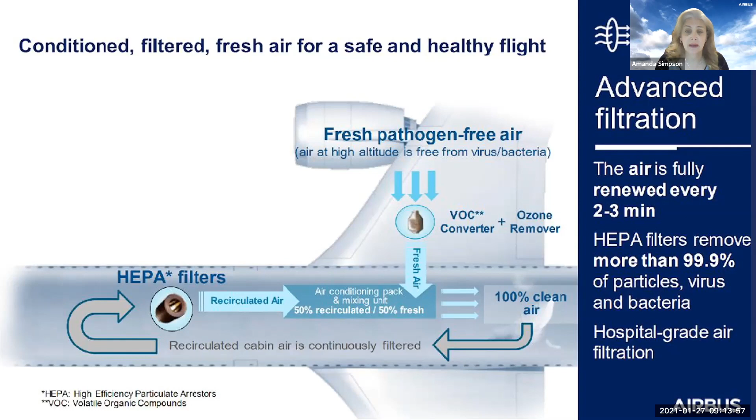Next slide. So this kind of shows what's going on with the air in the cabin. The air that comes into the cabin enters along the roof line. It is being blown in above the luggage bins, along the wall, and coming down through those little adjustable gaspers, as we call them, above your head.

So all the air flows from the top down to the bottom. It is then evacuated from the cabin along the joint at the floor where it meets the walls. Air does not flow from front to back or back to front. It only flows from top to bottom, so there is very little airflow between rows or between seats. That airflow is about 1 meter per second, so it's a little bit of a breeze, not so much that you feel it unless you turn on the gasper and it's blowing on you, but it is always providing very fresh, clean air for each and every person on board the aircraft.

So some of the things we've done, I look at it as a 3-legged stool for evaluating how clean and fresh the air is and how safe it is to travel even today. Airbus, Boeing, Embraer, we've all done what we call computational fluid dynamics, evaluating the flow of air through the cabin through advanced computers. These have been validated by an independent study by Harvard University that showed it is very safe. Even if a person is sick next to you, you have a very low probability of catching what they have.

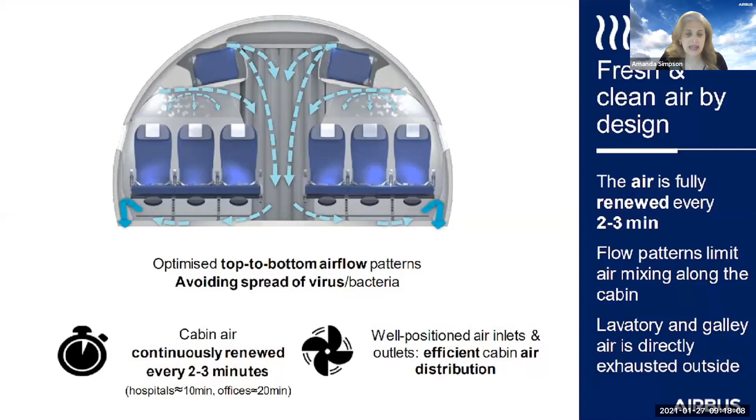So those are the things we're looking at. We're also evaluating new materials for the future, new systems for, say, touchless lavatories to make everything cleaner, to make everyone safer on board an aircraft. But right now, it is indeed safe to travel in an airliner. So moving on, next chart.

We're going to talk about one of the longer term issues, which is the environmental impact of aviation. And what you see here on this chart is the CO2 emissions from aviation. You can see the dip in 2020, and then we expect it to once again continue to grow as air travel grows, which is historically at about a little over 3% per year. The problem is we've got to stop the amount of emissions. The agreement and the industry goal is to get that down to half of the 2005 emissions by 2050.

And we're looking at a variety of different ways, and you can see those by the colors. One is, and this is already happening, airlines are offsetting their carbon emissions by various economic means. One of the things that is being touted very much in the future is sustainable aviation fuel, which would utilize carbon dioxide already in the atmosphere and recycle that into aviation fuel, thus reducing the amount of new emissions going into the atmosphere.

That thin orange stripe, that's operations and infrastructure. That's about how we fly. It's reducing the amount of time that aircraft are actually on their route or at altitudes where they are emitting more carbon dioxide than they do today. So it's becoming more efficient. It's reducing, delaying start time of aircraft so that they don't have to hold when they get to their destinations. There's lots of infrastructure and operational considerations that are going in.

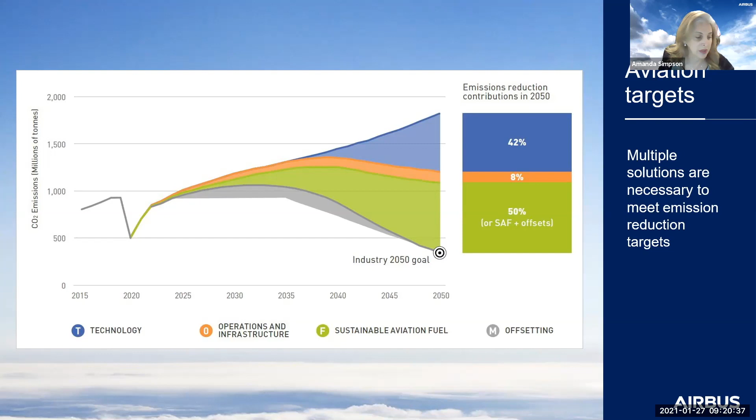And then the blue is what do we have to do with regards to coming up with new technologies to close that gap in the future. You can see that blue starts in about 2035, because technologies that are being looked at today won't actually be put into operation at the earliest till the mid-30s. So I'm going to talk about what some of those options are. Let's go to the next chart.

Some of the technologies we're looking at, we call it DISCO, the disruptive cockpit, which is adding automation and capabilities to the aircraft, because we believe there will be a need for single pilot operations. What does that mean? It means more automation, more autonomy, bringing some of those capabilities I talked about in operations actually into the cockpit so that the aircraft operates more efficiently and thus reduces the amount of carbon dioxide emissions.

Wayfinder is a project that is looking at autonomy. This was a spinoff of one of our projects I'll talk about later, Vahana, and they built a certifiable and scalable autonomy system for self-piloted aircraft. They are actually using that as part of the next project, the autonomous taxi takeoff and landing tests that were done last year, which uses computer vision to navigate and detect obstacles.

And we actually have done automated taxi, completely autonomous, hands-off landings and even takeoffs of our largest A350 twin aisle airliner. If you ever get to see the videos, you can watch the pilots sitting there with their hands off the controls as the aircraft performs these maneuvers, takeoffs, landings, and even taxi.

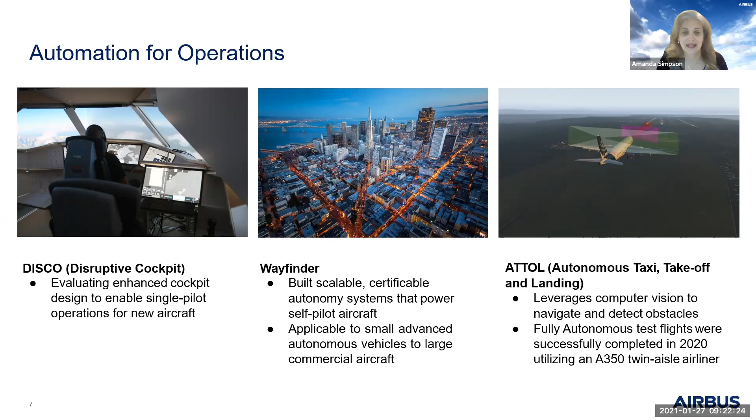We think there's really going to be some groundbreaking technology needed. So late last year, we announced our ZEROe concept aircraft, which are completely zero emission. They are going to be powered by hydrogen. Hydrogen, of course, when you burn it, all it emits is water vapor. So we rolled out 3 concepts, and you can see those there.

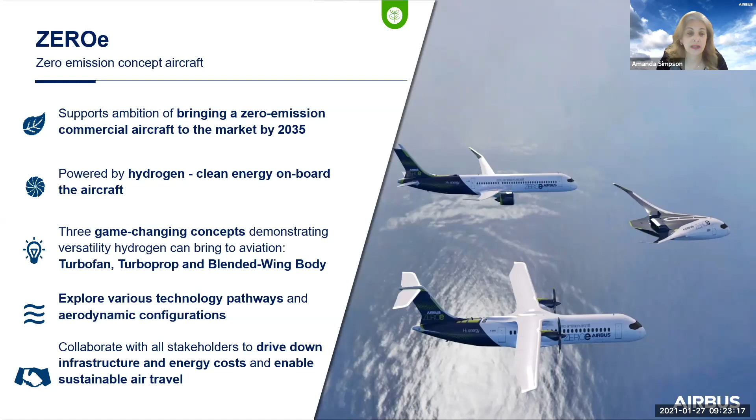I'm going to bring them up in the next chart in a moment. But the idea here is that if you change the source of the fuel, rather than burning hydrocarbons, you're burning clean fuel. So next chart, these are the 3 aircraft: turboprop, turbofan, and something a little bit more modern or advanced, which is the blended wing body. These are 100 to 200 passengers, 1,000 to 2,000 nautical mile range.

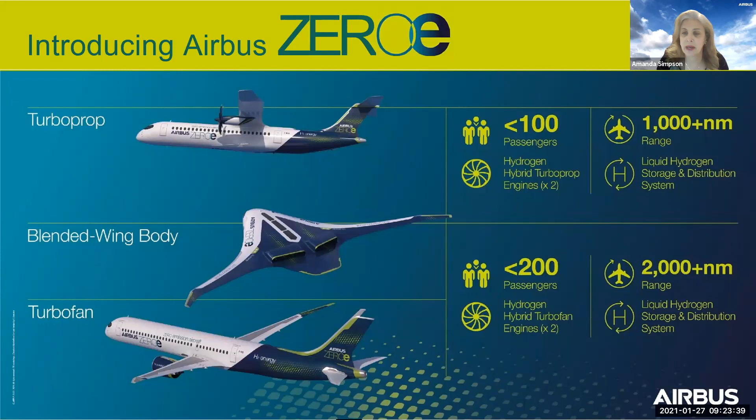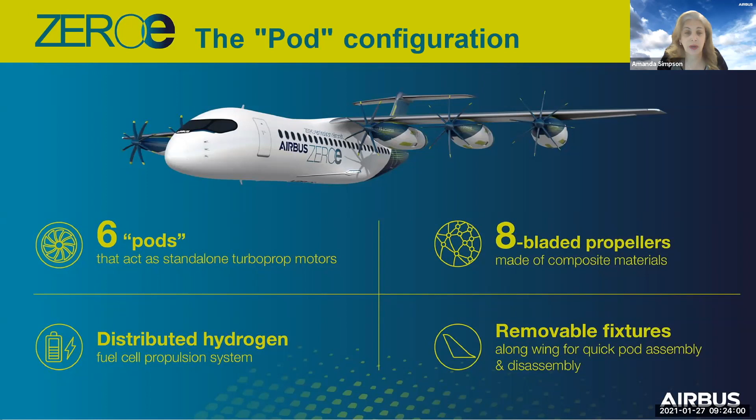Another concept we brought up recently is what we call the pod, which are fully self-contained systems. They have fuel tanks, they have the engines, the advanced propellers that would reduce and make maintenance simpler, as well as an introduction to bringing hydrogen to aviation. Right, next chart.

I'm going to briefly talk about our Perlan 2. Perlan 2 was a manned glider that a few years ago we used to set an altitude record of over 76,000 feet. We're going to use this glider to do some measurements on the effects of burning hydrogen at altitude and the environmental impacts. This was an amazing unpowered aircraft that made it up to over 76,000 feet.

Zephyr is an unmanned solar powered aircraft, also for Earth observation. We set a record with this aircraft being able to stay airborne for 25 days, 23 hours and 57 minutes. We landed a little early, missing the 26 day record, but what we set was a record. These are things we're doing to help monitor the environmental impacts of aviation.

And of course, we have numerous others. We are one of the world's largest builders of environmental monitoring satellites. I've listed several of the constellations that are out there that are either optical, infrared, or radar, monitoring our planet to understand what is happening to the environment.

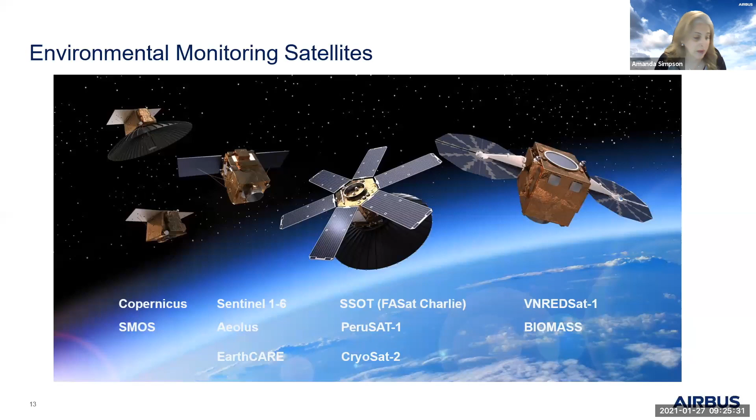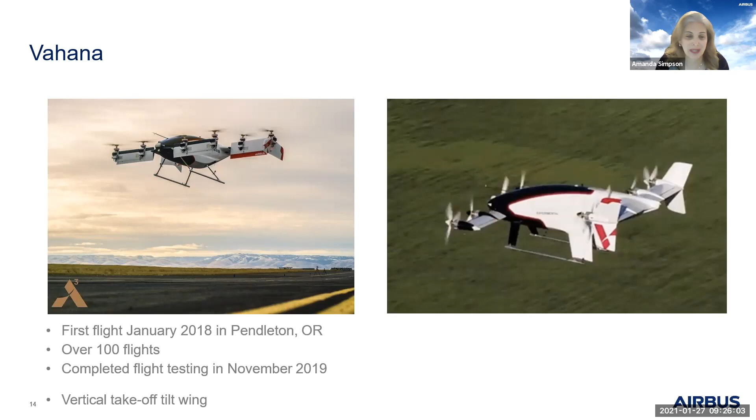Talking about unmanned flying cars, Vahana was a project done up in Oregon. It was a single seat, completely autonomous vehicle. It conducted over 100 flights and was able to demonstrate over 50-mile range, all on electric power. Videos are available, they're very interesting. Again, completely autonomous, vertical takeoff and landing. Get in, push a button, and off it goes to your destination.

Now looking at City Airbus. I jokingly call it the world's largest quadcopter, but this one holds 4 people, and it's undergoing testing out in Germany. It is optionally piloted and is getting ready to go through certification trials.

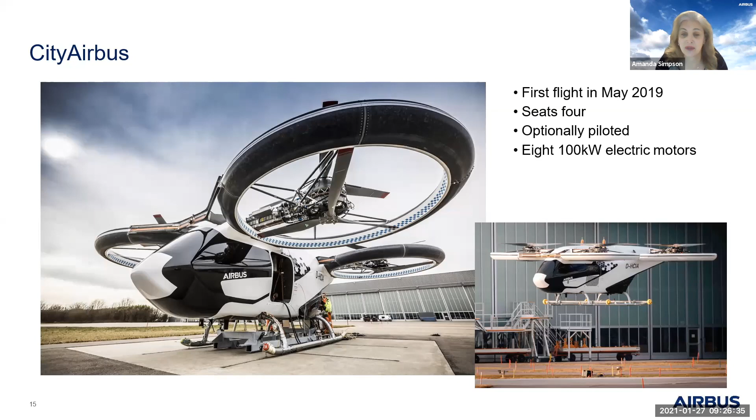I'm going to talk a little bit about Altiscope. This is looking at the impact of having hundreds, if not thousands of vehicles in an urban environment. How do you coordinate and make sure not only that they all reach their destination safely, but integrate weather, routing, collision avoidance, micro weather - what's weather like down between buildings - ensuring an aircraft's going to have a place to land before it even takes off. How do you handle emergencies, and integrate with helicopters, package delivery vehicles, and other aircraft operating in these spaces.

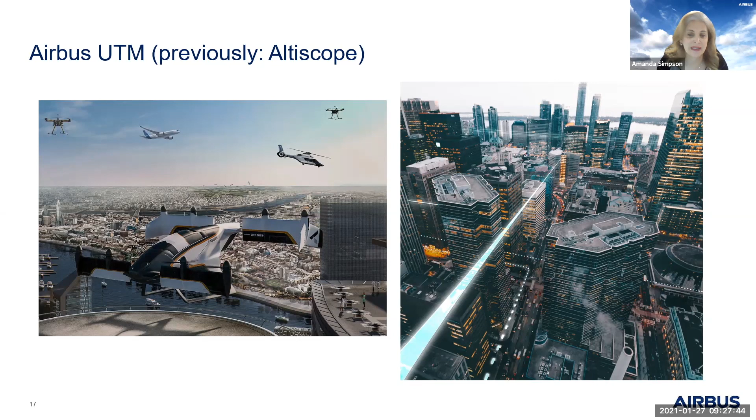So I've probably gone over my time, but I hope you find this very interesting. I will be around later to answer some questions. And with that, I will turn it back to Juhi.

Thank you, Amanda. That was a fantastic presentation, and it's really heartening to know that despite all the challenges, we have a lot to look forward to in the world of aviation technology. Speaking of which, our next segment is a demonstration of cutting-edge innovation in aviation. The presenters on your screen will walk you through technologies they have developed to enhance applications in various aspects of flight, both manned and unmanned.

Allow me to introduce your moderator for this technology showcase, Executive Editor for Technology at Aviation Week, Mr. Graham Warwick. Born and raised in Scotland, Graham has a degree in aeronautical engineering and was an engineer at Hawker Siddeley Aviation, if you remember the Harrier, before he became an aviation reporter. Please welcome Graham Warwick.

Thank you, Juhi, and welcome everyone to this aviation technology showcase. Despite the damage wrought by the pandemic, this is a remarkable time for innovation in aviation technology, from medical drones to urban air taxis to many of the things that Amanda talked about. Today, we are featuring 4 companies that are at the forefront of ushering in some of those technologies that are going to enable this new age of aviation.

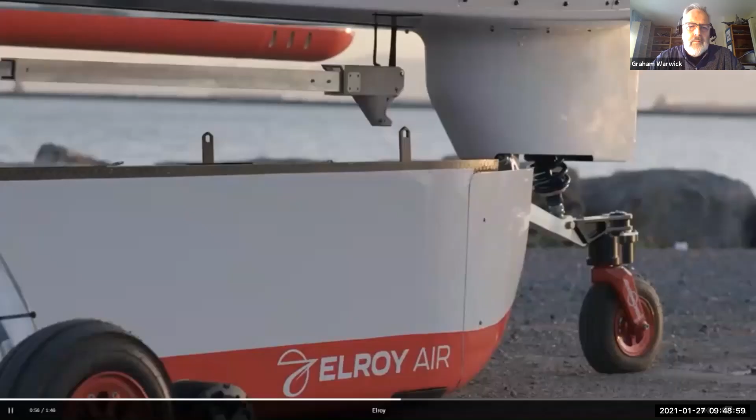Our cargo containers are separate from the aircraft. Once a cargo container is packed, it is set outside for pickup. The Chaparral taxis over the container, picks up the cargo, then takes off vertically. The vehicle transitions to wing-based flight and recharges its battery en route to its destination. When the Chaparral lands at the destination, the system will deliver the container and pick up another for the return flight.

We believe that extending the reach of express logistics can improve the quality of life around the world. This is a rare moment where technology can leapfrog today's infrastructure challenges. The Chaparral can connect the dots between people, places, and goods in ways that were not possible before, delivering rapidly to warehouses, hospitals, and communities in need around the world.